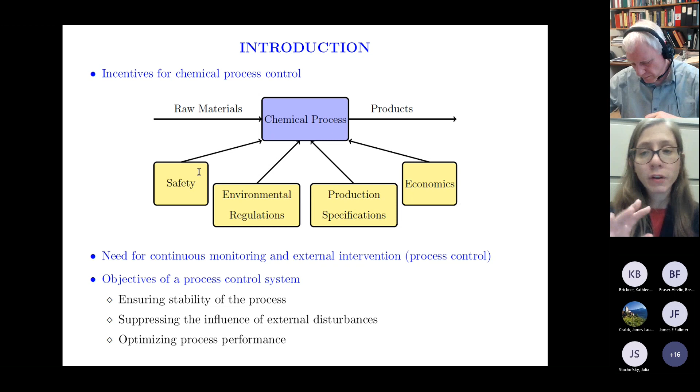Instead of continuously having people stand at every single valve to manipulate them, we use automated systems that continuously monitor and externally intervene when they see that any of our objectives is not being met. This is what forms our process control system.

The basic way a process control system works in industry is through a feedback loop. We have our process, and there's a variable called the output that we measure with a sensor. The sensor measurement gets compared against the value we want that measured variable to take, which we call the set point. Then there's an error between our set point and what we measured.

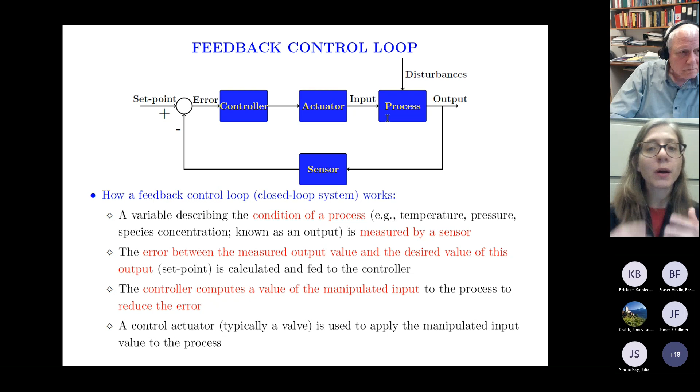Based on this error, the controller, which is really like a computer, runs a mathematical algorithm to figure out what it thinks the actuator should do to reduce the error. It tells the actuator to do this, and the actuator does that, impacting something physical at the process. For example, if the actuator is a valve, the valve will open at the real system, actually affecting what's going on in the real physical system.

The big question in my field of control design is: what is the algorithm that this control algorithm is running? One common approach, very common in undergraduate chemical engineering, uses a single input, single output control design known as proportional integral derivative, or PID control. This is a case where the control action or input is calculated according to a mathematical expression.

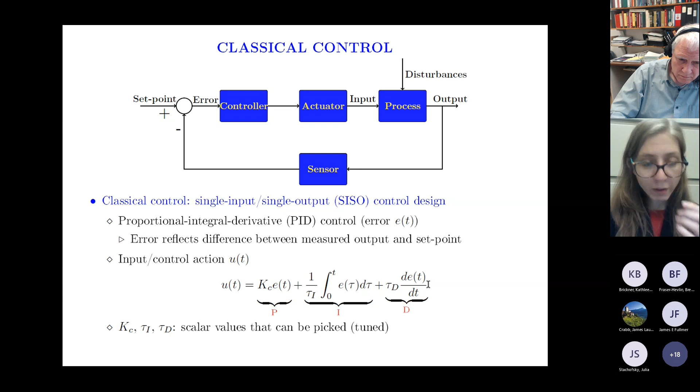It says the input to apply to the process should be equal to some function of the error between the set point and the measured value of the output, the integral of the error, and the derivative of the error. This has been a successful design in industry, but it doesn't handle everything. There can still be challenges with this control law.

And so that has been the reason that people have suggested maybe we can move to more advanced control designs. And often these are model-based, meaning that they'll use a dynamic process model explicitly for their design.

This mathematical model can be developed either from first principles modeling, so that will be things in chemical engineering like mass and energy balances and all the physics, or you can get your models from identifying them if you have input and output process data. So then you have a model that describes your process dynamics, meaning how your process state variables change in time due to disturbances, inputs, and interactions between variables.

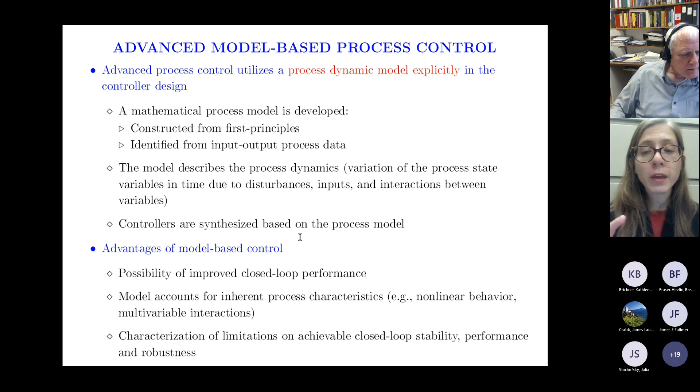And then you'll make a controller where it is specialized to this specific process model in order to help it outperform some of the more classical control designs in certain circumstances.

And so usually in chemical engineering, we deal with nonlinear models. And so we'll have nonlinear model-based control. So the question might be, why is that?

Well, here's, for example, one of the first kinds of chemical processes you would learn in a reaction engineering class. It's called a continuous stirred tank reactor. We have here just some tank, and we assume it's well mixed. There is some feed into this containing a reactant A, and it has an initial feed concentration and temperature. We have a heater in this reactor. Then we have a concentration of the reactant in the outlet stream and a temperature of the outlet stream.

So in chemical engineering, we learn how to model systems like this from the physics, and we do what's called mass and energy balances. Those are basically reflections of mass is conserved, energy is conserved. And by doing those, we can end up with equations that look like this.

And so these have nonlinear terms, like these exponentials being multiplied by concentrations. And the reason that we get these nonlinearities here is this is actually the reaction rate law, this part with the exponential and the concentration.

So in chemical engineering, because chemical engineering is about chemicals and we'll have reaction rates, we usually have nonlinear models. And so we'll want to develop a general notation for talking about cases where we're controlling some nonlinear system. It doesn't only have to be this continuous stirred tank reactor, it could be any chemical process or other process described with a nonlinear model.

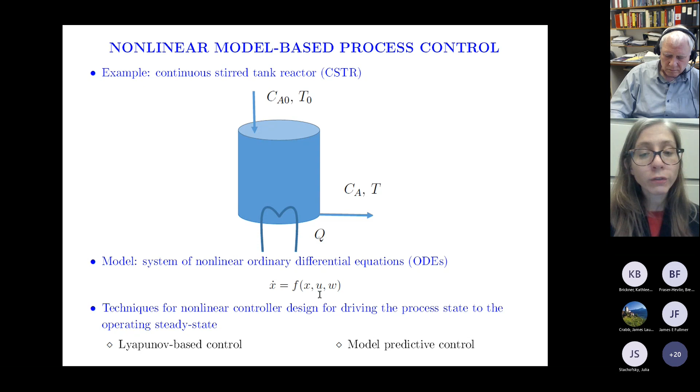And so with all of that, we can now have this notation that means a system of nonlinear ordinary differential equations. So it says the time derivative of our state is equal to a nonlinear vector function of our states, inputs, and our disturbances. And there are many different control designs that have been looked at for trying to drive processes like this from some initial condition to a steady state of this system where the variables no longer change in time.

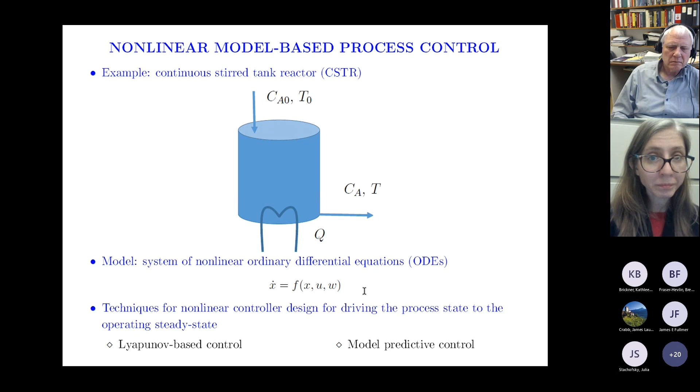And so I'm going to make some assumptions about this dynamic model that we're going to use going forward. One of these is that our states, inputs, and disturbances are all bounded. I'm also going to assume that this process is what I'll term stabilizable here.

In the sense that we have an explicit nonlinear feedback control law, meaning that we have a control law that's an explicit function of the state. And this is able to make our origin or steady state asymptotically stable, in the sense that there exists this function called a Lyapunov function, which has the special property that its time derivative is negative along the state trajectories of the system when it's under this controller h of x and when we're not considering disturbances. And it does this for all x in a neighborhood of our equilibrium point or steady state.

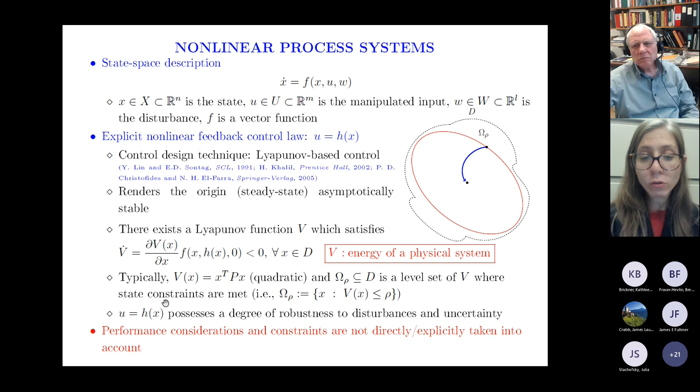And then we also have this condition about v dot being negative. And so this controller h of x is able to give us a degree of robustness to disturbances and uncertainty, which means that even when we have disturbances or uncertainty, we're still able to drive our state toward the steady state. But even though it has those properties, it doesn't account explicitly for performance or constraints.

And so that was the reason that people developed what's called Model Predictive Control, or MPC. So this is an advanced control law that's actually an optimization problem. So what that means is that it figures out how to operate the process optimally all the time. And so the way that it does this is it solves this optimization problem repeatedly.

And then we'll also have the dynamic model as one of our components of this control law, initialized from a state measurement, and then we'll have input constraints and state constraints. So we solve this optimization problem every delta time units, where delta is what we call a sampling period. This means we solve it at every sampling time tk. And then the solution is a piecewise constant input trajectory with n pieces, where n is what we call a prediction horizon, and each piece is held constant for a period delta, which is the sampling period.

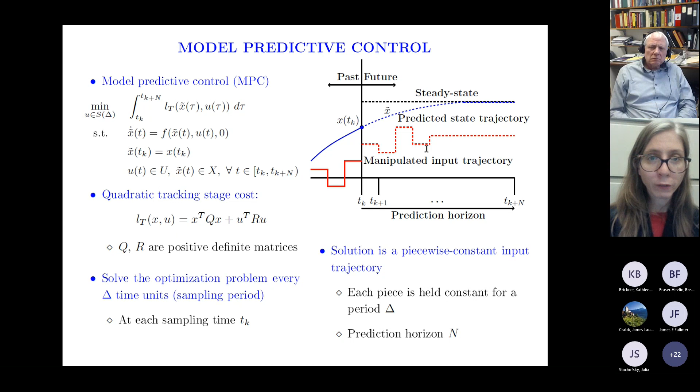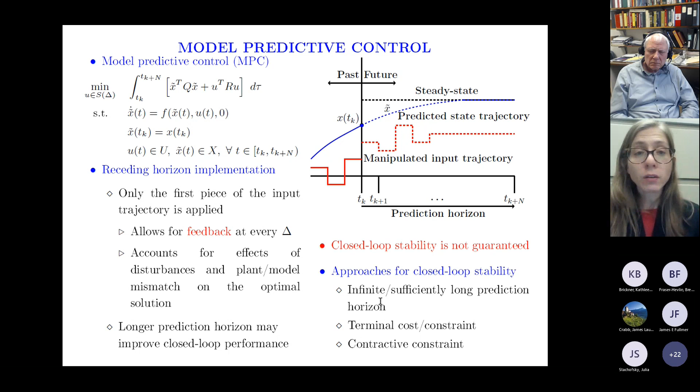So we actually constantly solve this optimization problem because our model that we use in the controller never matches the reality. So we have to get feedback in order to account for this mismatch and be able to update our control actions. So traditionally, with this quadratic stage cost, the notion of stability is that you drive the state toward the steady state. So this formulation of MPC on its own does not guarantee that you do that. And so there have been a lot of ways that people have looked at modifying this control law in order to be able to make theoretical mathematical guarantees about being able to actually approach the steady state.

And so that's what model predictive control is. How do people typically use it in next generation manufacturing and the process industries? Well, the typical way has been actually in a hierarchical approach. So you can see here this hierarchical approach. There's a steady state economic optimization problem that's solved to determine the economically optimal steady state to operate at.

That's sent to the tracking model predictive controller with that quadratic objective function. And then that quadratic objective function is then centered around this economically optimal steady state. So the MPC is going to compute control actions which drive us toward the economically optimal steady state, and that will help us run our process.

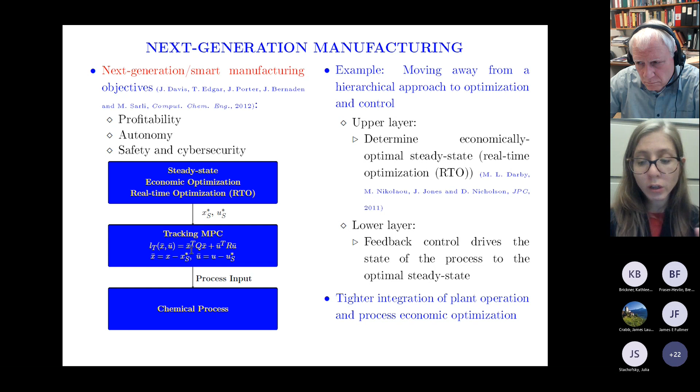Now, one of the disadvantages of this that has been looked at for quite a number of years now is the idea that this separates economic optimization and control. So maybe instead we could combine them. And when people combine them, it's what we call economic model predictive control, or EMPC.

And so the idea of this is that we say, we do not have to use this quadratic objective function. We can use any objective function we want, and it could be representative of our process economics. Now our controller is explicitly optimizing economics constantly instead of just trying to drive us to the steady state. And then we would need to try to figure out, how does that controller work? Does that still guarantee stability?

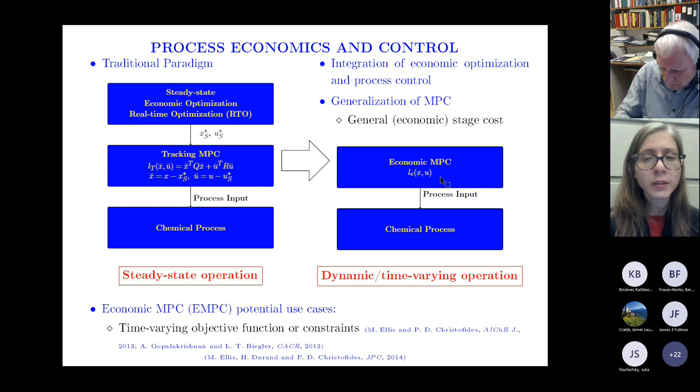There's been a lot of work on that over approximately the last 10 years, as people have been trying to better understand the implications of changing that objective function on the stability we get for this type of control law.

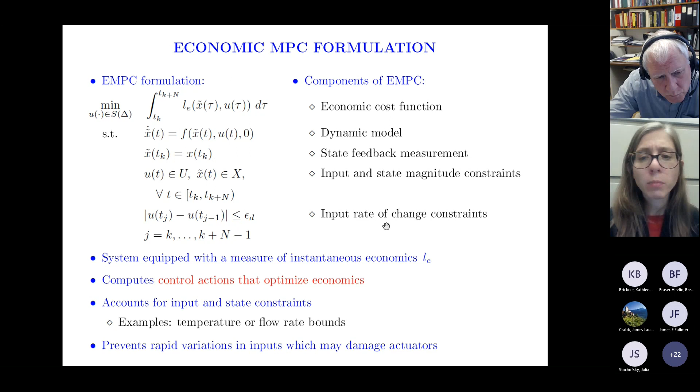The basic components of this type of controller look very similar to standard model predictive control. The main difference is that you change the economic objective function. You can also add additional constraints, like input rate of change constraints, which say the control actions I'm computing when optimizing economics might be more aggressive than if I was just driving to a steady state. So I put a rate of change constraint to prevent aggressive actuator use.

But one of the big questions is how are we going to update this control law in order to maintain stability or safety? One approach that inspires a lot of the work I'll talk about today is the Lyapunov-based Economic Model Predictive Controller, LEMPC. This has the same format as the EMPC on the prior slide.

There's a slight change to the way the input rate of change constraints are denoted here for feasibility reasons. But the big change is this new Lyapunov-based stability constraint. It says that the value of the Lyapunov function has to be less than or equal to this upper bound, rho e, meaning the state has to be maintained in a subset of the stability region.

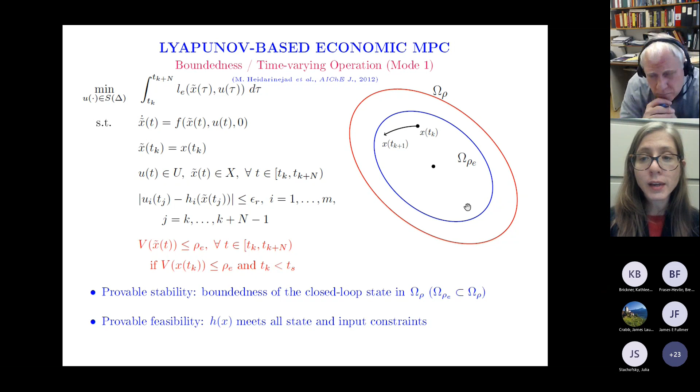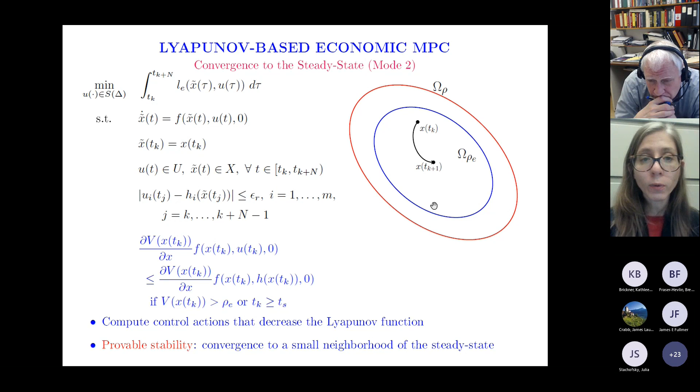There's a second mode of operation of this controller that says, instead of keeping the closed loop state in omega rho e, drive it toward the steady state. The combination of these two modes of LEMPC can guarantee that with sufficiently small plant model mismatch, we're always able to keep our state in the larger stability region, omega rho. That's a notion of being able to guarantee safety under this control law.

Now that we have some background on the type of advanced control laws I'll be talking about, we can start moving into the cybersecurity question. One of the first questions is, do cyber attackers really care about attacking controlled manufacturing systems? And the answer, as we see in quite a number of case studies, is yes.

Going through a few quickly: one of these is Stuxnet, which happened in 2010, an attack on Iranian nuclear facilities that, through a worm that entered the systems via USB sticks and spread, was able to run centrifuges at conditions outside their operating range and break them.

There was also the case where a company was worried about whether their operational technology had been compromised after getting a ransom note requesting payment on a company computer, so they shut down the Colonial Pipeline. So the outcome of all of these is yes, cybersecurity of process control systems is an important issue.

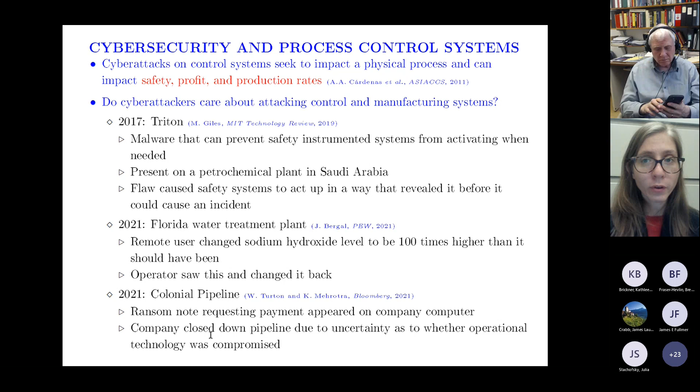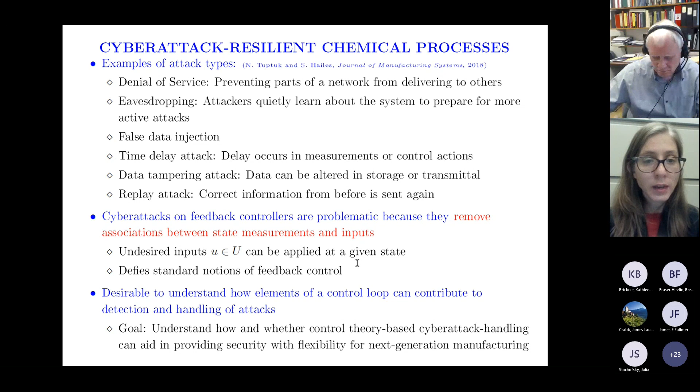One particular problem with cyber attacks on control systems is that control systems rely on the notion that our measurements of the state become related to the control actions we take. But what cyber attacks do is remove this association between the state measurements and the inputs we apply.

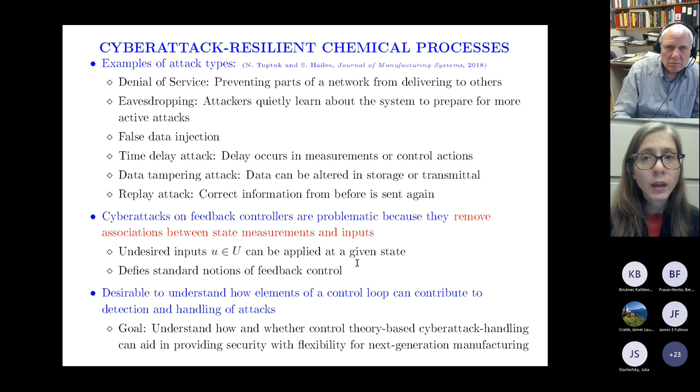One thing we can do is try to understand mathematically what that means. For example, let's say there's a specific type of attack, a case where the sensor measurements never make it to the controller, and instead we're sending false state measurements to our controller. In this case, what would it mean for us to be cyber attack resilient to this type of attack?

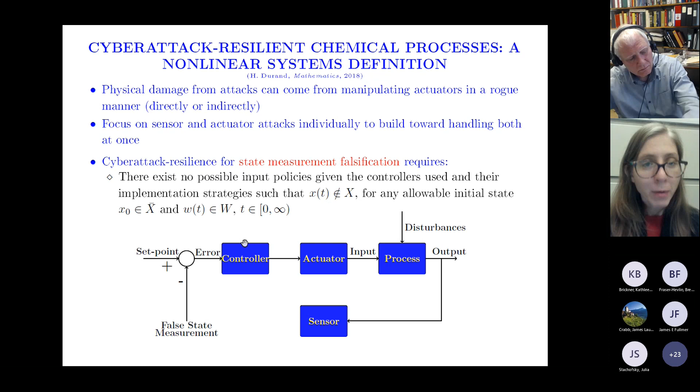Mathematically, we could put some conditions like: there would have to be no possible input policies I could ever calculate, given the controllers I use and their implementation strategies, such that my state leaves a set of safe states for any allowable initial condition and any disturbance trajectory for all time. Now, the problem with this is that it's not very constructive—it doesn't really help us figure out any type of resilient control design.

So let's take a look at a process example to help us gain a little more insight into what it means to be cyber attack resilient versus not.

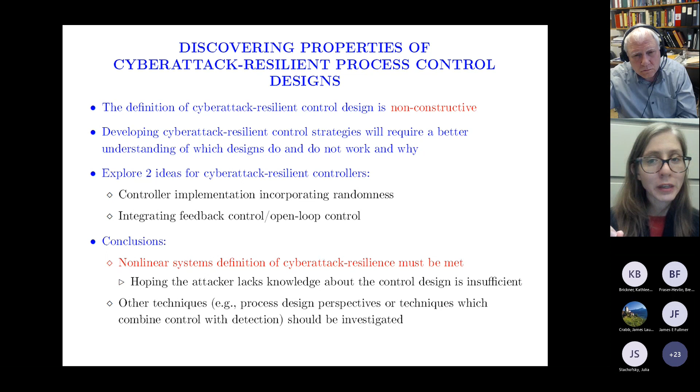This specific process example is motivated by the idea that an attack might be designed to try to reverse engineer a known control law. Specifically, say someone wants to attack your sensors—if they know the relationship between your sensor measurement and the input you're going to apply, then what they want to do is figure out what's a bad input for your current process state, back calculate what sensor measurement they need to give you to get you to calculate that input, and then tell you about that.

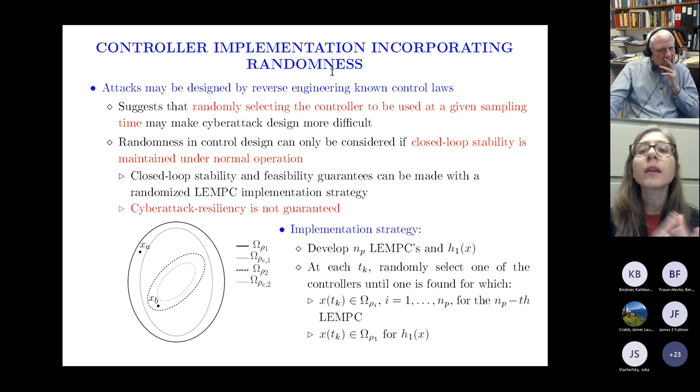So one idea we might have in that case is to say, maybe I could try to randomly select the controller I'm going to use at a given sampling time. Maybe that will make it more difficult for the attacker to reverse engineer my control law and figure out what problematic state they want to give me as a false state measurement.

Now, using randomness in any control design would only be allowable if we would actually maintain closed-loop stability or safety during normal operation. So we developed an implementation strategy that involves a set of LEMPCs and other stabilizing control laws. At every sampling time, we randomly select one of these until we find one for which the state measurement we have is within the stability region of that control law. Then we are able to apply that one to the process.

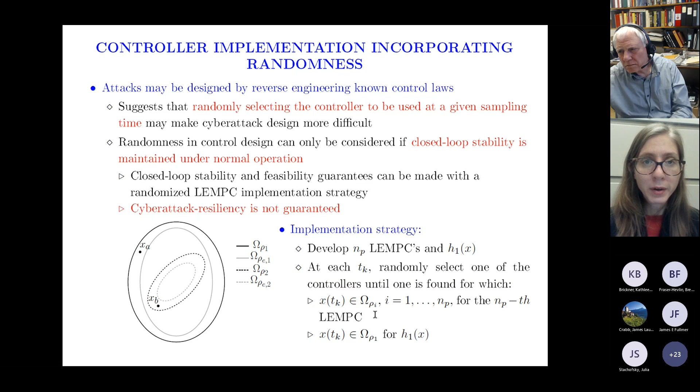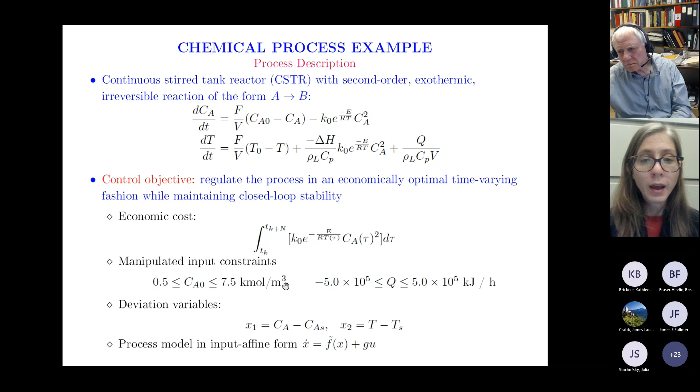So let's take a look at how well that works. Here we'll have, again, a continuous stirred tank reactor with a second order exothermic irreversible reaction. Our control objective is to regulate the process in an economically optimal, time-varying fashion while maintaining closed-loop stability. We have manipulated input constraints, our objective function being related to the production rate of our product, and we'll also design Lyapunov-based stability constraints for this system. Then we'll design 6 different LEMPCs for our system and also an explicit stabilizing controller.

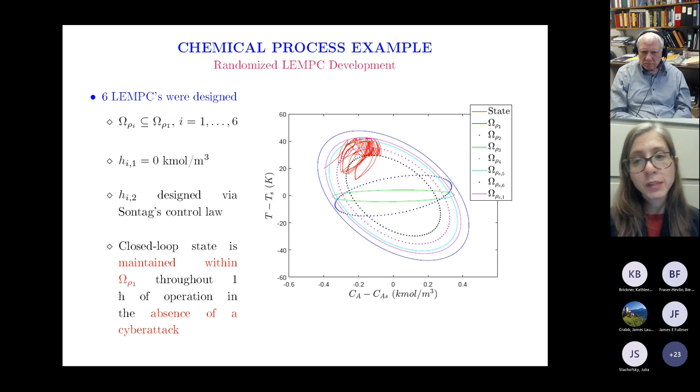So what happens if we add the attack? In this case, we're going to have a false sensor measurement. We apply it to a single LEMPC and then also to the case where we're using our randomized LEMPC implementation strategy. The results do depend on the seed to the random number generator, but in all the cases we tested, there was not a very significant delay in the time it took for the cyber attack to cause operational issues for the single LEMPC versus the randomized LEMPC.

So the problem here is that the randomized LEMPC implementation strategy really could not guarantee that you would never be able to calculate a problematic input over time. This really demonstrates that developing a control theoretic understanding of how to get cyber attack resilient control designs is very beneficial and is needed in order to be successful at fighting off the attackers.

So this led us to consider maybe detecting attacks, and how detection algorithms could work together with control laws to try to flag the attacks before they cause a problem. We tried a number of different strategies to understand when these different ideas would or would not work. Some of the things we looked at included, for example, an LEMPC strategy that tries to probe for cyber attacks actively—it tries to say, maybe there is one, let me check if I can find it.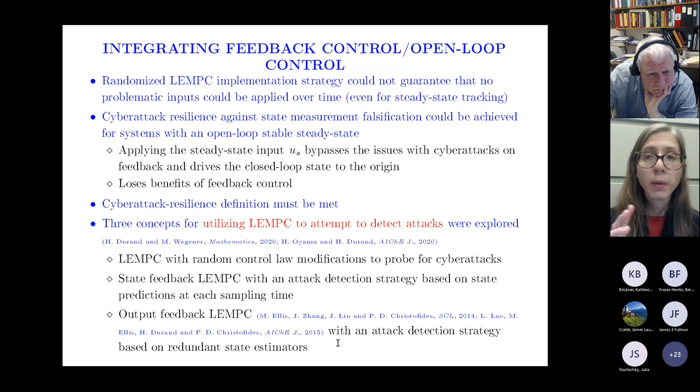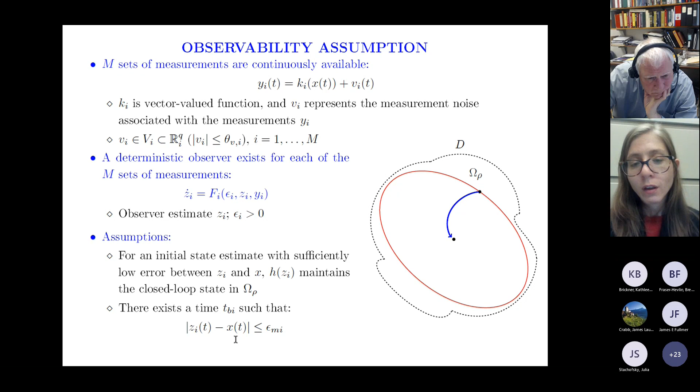Then there was another case where we were using a more passive detection strategy, based on getting state predictions and comparing them with the measurements we were getting. And then there was another one that uses what's called state estimators, comparing the estimates against each other—I'm going to go into a little more depth on that one now. The idea is that we have M sets of measurements that are continuously available, and we have these observers or state estimators that have a special property: there is a time after which the state estimate becomes very close to the actual state, so there's a bounded error between those.

And so now let's consider what happens if we design an LEMPC, but now the LEMPC is getting a state estimate instead of getting the full state measurement. And so in this case, if our estimate was to be wrong, because maybe our state measurements were wrong that were used by the estimator, then this could be a problem for our control law. We might get a destabilizing effect.

But we said that we have a number of different estimators, and so that gives us a level of redundancy. They could cross-check each other. So because we know that there is a time after which, if an estimator is correct, it becomes within a bounded amount of error of the actual state, this implies that when there's no attack, any two estimators should be within a bound of each other after some amount of time.

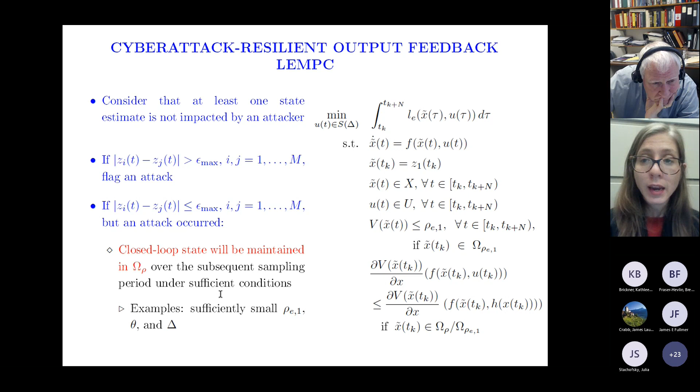So this means that if we notice that they are not within a bound of each other, we should flag it as an attack. And we have also been able to prove that if these two estimates are within a bound of one another, as long as at least one estimate is not impacted by an attacker, we can actually maintain safety of the state at all times before the attack is detected.

So one thing that comes up with regard to these ideas of how to handle the cyber attacks on sensors is the question of how is that different, or how are cyber attacks in general different from handling, for example, faults on the equipment? This really starts to come through when we start looking at handling simultaneous actuator and sensor attacks. So to do this, let's go back to our continuous stirred tank reactor.

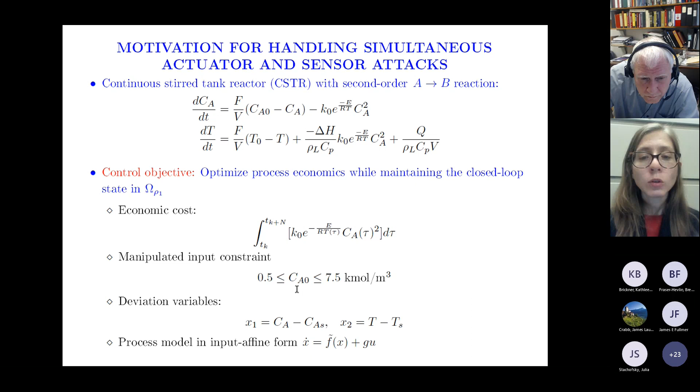So again, we're going to maximize our economics related to our production rate of our product. But in this case, we're going to have a manipulated input constraint where we're only going to have one input now. This is only going to be the concentration of reactant in our feed. We're going to design a new Lyapunov-based controller for this system. And what we're going to do is give full state feedback to our LEMPC.

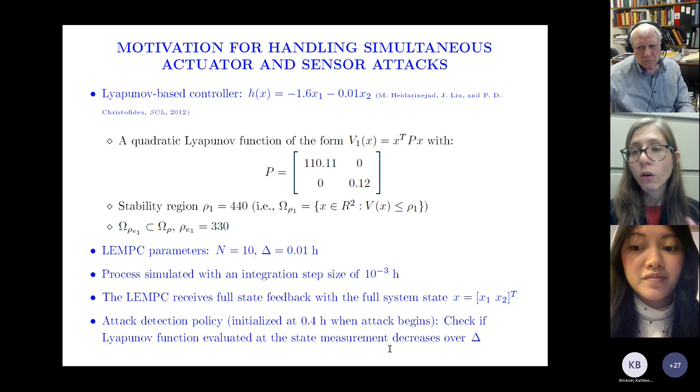So in terms of the attack detection policy that we're going to use to showcase how attacks are different from faults, we're going to use the following one: we're going to check if our Lyapunov function is decreasing over time. And so we do expect that it should be, because, for example, let's look at the case there's no attack.

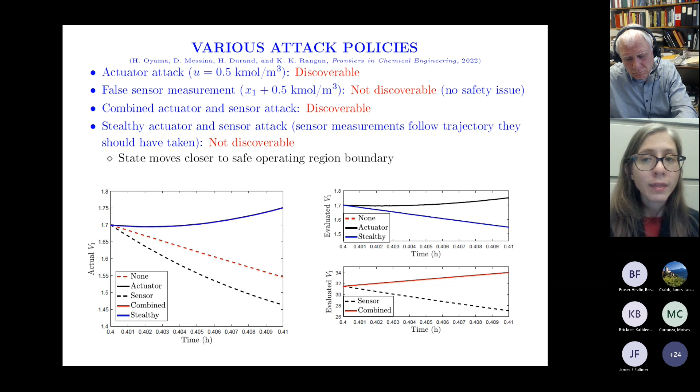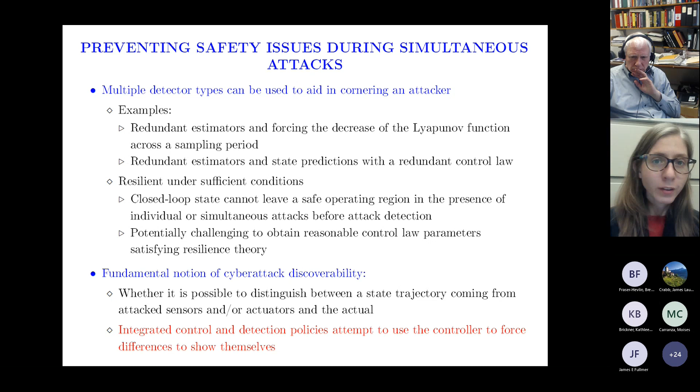Now I'm going to pivot a little bit to the quantum computing aspects of this talk. As mentioned earlier, this is not explicitly related to cybersecurity, but it is related to cyber-physical systems. And I think in the future, you never know where this will go. So this is really at an exploratory phase for us right now.

So what we want to look at is what would it look like if you implemented control algorithms on quantum computers. As was mentioned earlier, today we implement control algorithms on classical computers because controllers are really just computers. So what would happen if they were quantum computers instead?

For this, we need a little bit of background on quantum computing. Information on quantum computers is stored in qubits. Qubits are the quantum computing equivalent of bits in classical digital computing. And one of the interesting things about quantum computing today is how much you need to understand quantum physics to follow a lot of the things that happen in the literature.

And you can get superposition states on a quantum computer, where you can have a superposition of the ket 0 and ket 1 states.

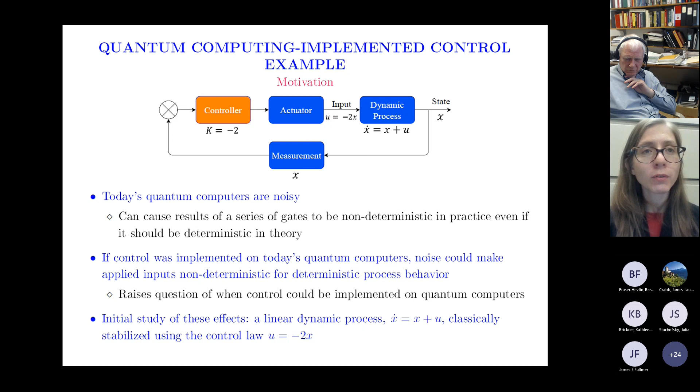One thing we have to do is figure out how we're going to get a simulation going for this case. IBM actually has something called the Quantum Experience that anyone can use to access real quantum computers. But the problem is the free ones are pretty small, with only a few qubits. At the time we did this, there was only 1 qubit and 5 qubits available. That's like having 1 bit or 5 bits for computations, which isn't a lot to do much that's meaningful.

So what we wanted to do was use what's called a quantum simulator, also available from the IBM Quantum Experience. This tries to replicate aspects of the mathematics and physics of a quantum computer through a program executed on a classical computer. One thing it has is the ability to incorporate what's called a noise model, and there are different ways to get that noise model.

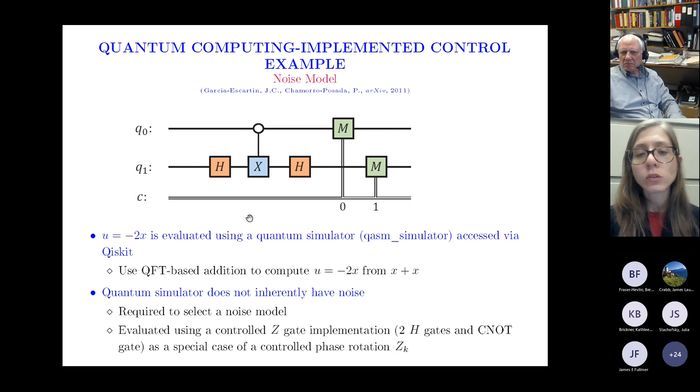One of the ways we wanted to do this was to use the 5-qubit quantum computer, and we wanted to see whether or not the noise model we were using seemed consistent with a noise model that could come from a get noise from backend command with respect to this 5-qubit quantum computer. So we needed to choose a circuit to help make this evaluation, and we chose this one representing a controlled rotation gate.

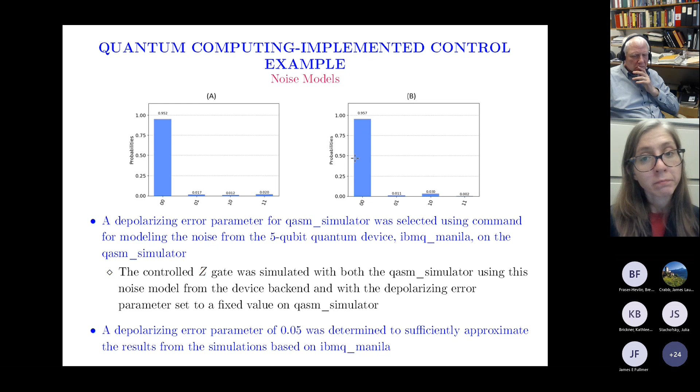Here we see the results. On the right is the results from using the get noise from backend command related to the 5-qubit quantum computer, and here is the results from using a depolarizing error noise model. We see that they were approximately the same. So we use this as a benchmark to say, okay, we think this is a sufficient noise model for us to start analyzing the control actions that would be determined by this noisy quantum computer.

So now what's left is to look at the state and input trajectories being computed, and we're going to look at that in multiple cases. What happens if we use our controller on a classical computer? What happens if we implement it on a quantum simulator with 254 shots and no noise—we'll call this the ideal quantum system. And if we use a quantum simulator with 254 shots and noise, we'll call this a noisy quantum system.

Shots here means the number of times you run the quantum algorithm. So we would run it a certain number of times, and then run a Python command that would take the answer computed the maximum number of times. If there wasn't just one maximum, it would return one of the answers that had appeared the maximum number of times among multiple.

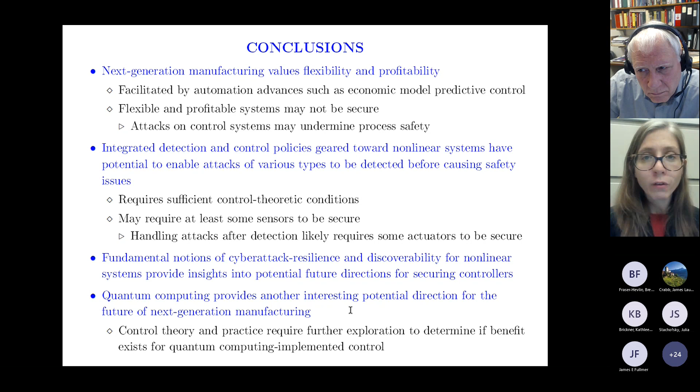So I would like to thank our funding sources and also my great PhD students who have done the work that was shown here today. Thank you so much for your time, and I'll be happy to take any questions.